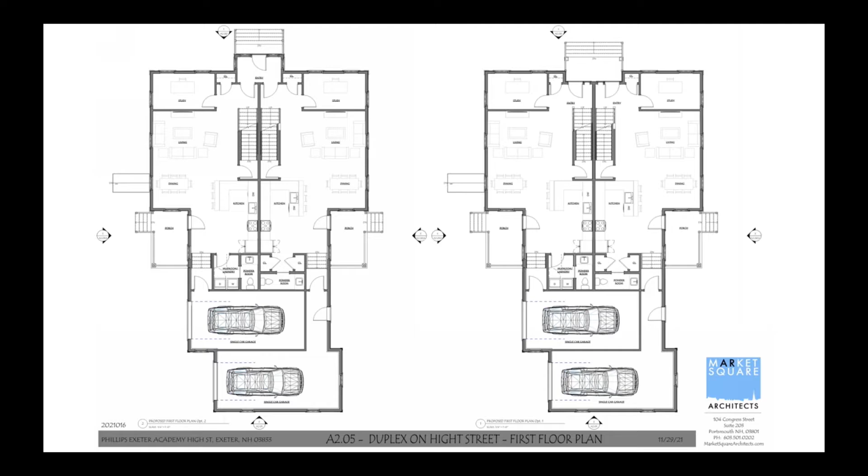And that's the garage side elevation. That actually faces Gilman Lane. And the details, the layout, just the house will be on the front, and the garage will be on the back. Correct. So the front, that's the front elevation that faces High Street. So that's all you'll see. Correct.

This is the elevation that faces High Street. This is the side that faces left to 35 High Street. So that's that garage mass in the rear of the building. This is the side elevation that faces Gilman, so those are the two garages. Gilman Lane comes down here. This is where it becomes a landscape area, and we truncate that drive, and there is a turnaround at the end.

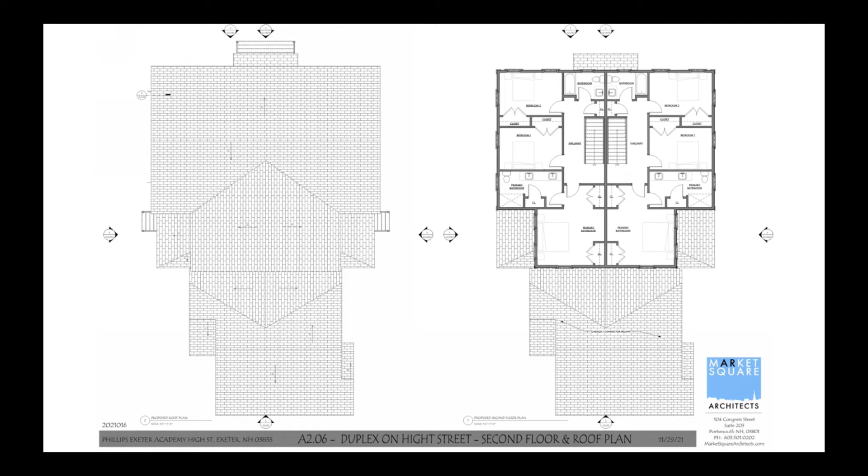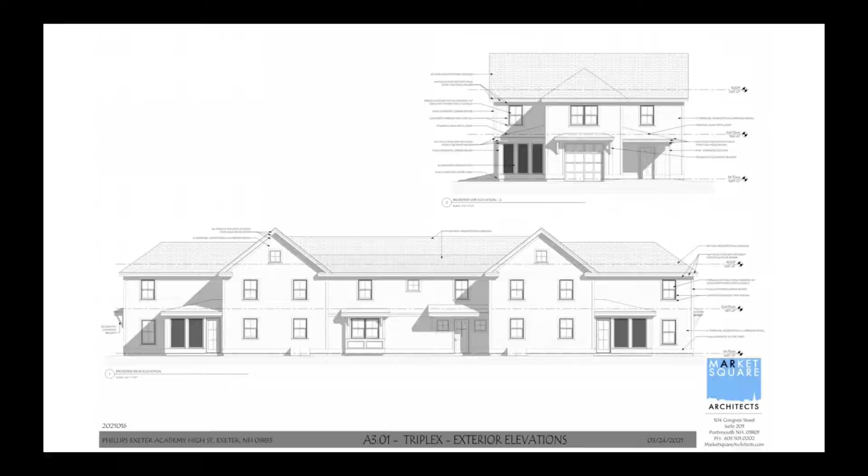So this is that triplex in the middle of the property. This building, we are still in conversations with the HDC, it has not been approved. So this is entirely faculty housing, there's no student housing at all in these structures, thank you. It's faculty housing, and there's a few different types.

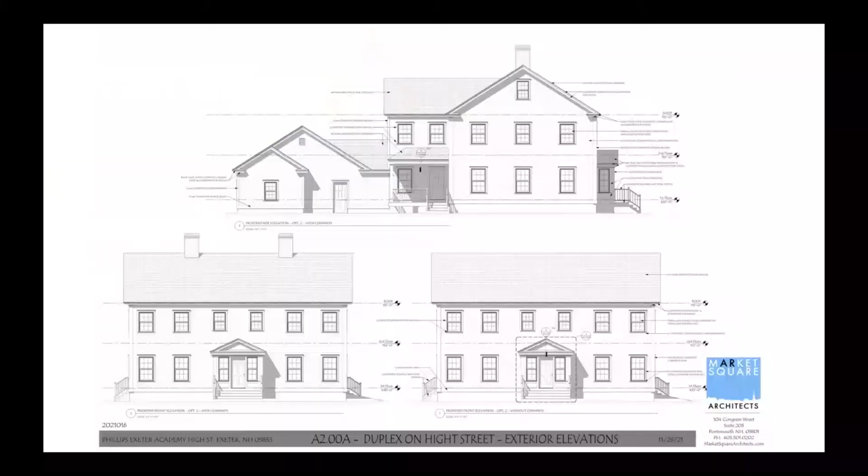So this is the duplex that's in the rear of the property. These are intentionally sort of traditional forms, traditional details, but a little bit of a step away from the historic, intentionally, where the historic buildings, a part of the HDC, are in the front. These buildings are outside of the HDC, by approximately 4 inches, I'd say.

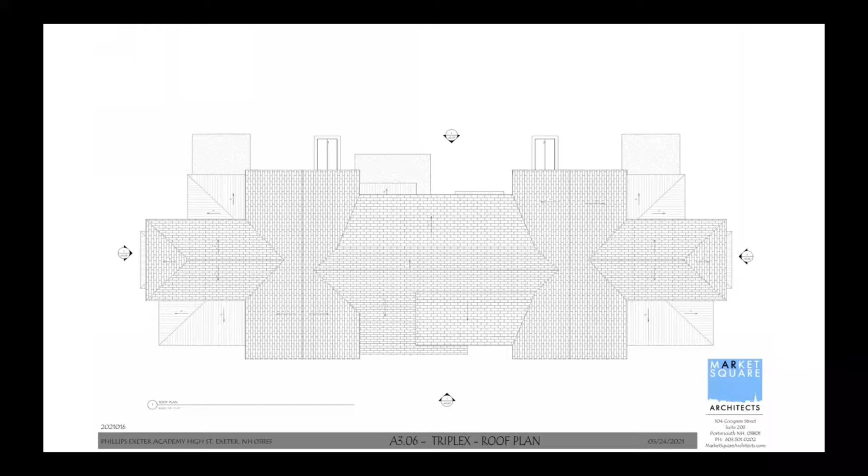Skip ahead. Oh, that's it. Will they have a walk around, or a sidewalk on all of these? So that sidewalk, I'm gonna go back to that site plan, I know I'm jumping around. So there's only gonna be one sidewalk? Yeah, so the sidewalk comes down along this side and remains on that side and terminates basically where that gate is that goes back to the extension of Gilman Lane down to the athletic fields.

So the shaded area here is the portion that is outside of the HDC, and they have this drive that comes over to the existing Stuckey garage. This is a single family and 2 duplexes in the back, essentially identical other than color and some details. This is the triplex where we're still in conversation with the HDC, at that center road. Here you see the truncation of Gilman Lane, although there is a turnaround at that end. This is the new duplex that's been approved on High Street, and then this is the existing 35 that's being renovated.

Variance here. Are there any specific questions on design, or does that give you the flavor? That was very helpful, thank you very much.

Just one last thing - we already have to go through site plan subdivision review with the planning board. We've already met with the Exeter River Advisory Board, so we've reached out to them. This project is also going to require a New Hampshire DES alteration of terrain permit, so we'll have a review from them, and we're going to be submitting a shoreline permit application because of the proximity to the Exeter River. So we have multiple reviews that this project will go through. Certainly for stormwater management, we're going to be meeting all of AOT and the town's stormwater regulations, providing stormwater treatment and retention to a site that was developed prior to any of those regulations. So we're looking to provide some significant improvements to the site as well.

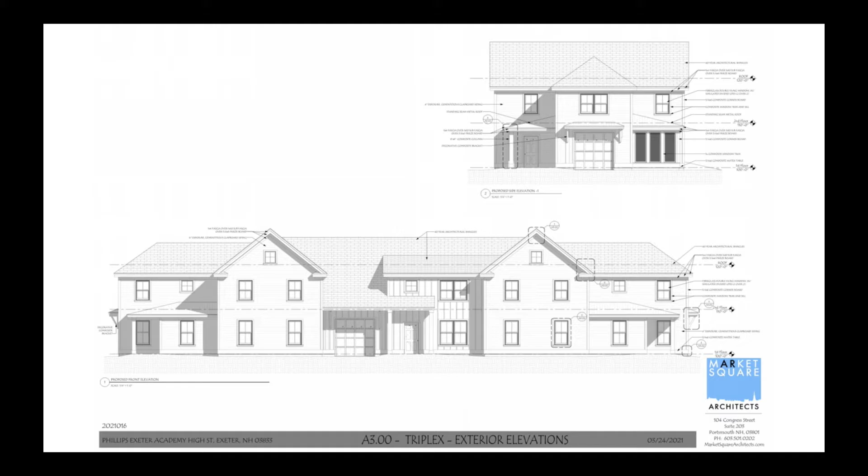This is a unique area because it really... oops, what did I do? This is why they don't give me the thing. Yeah, I'm getting way beyond my expertise when you start putting up those drawings. And how do I zoom in? Because I did - next slide. Oh, here we go, okay.

So this is a unique area because it's a blend of commercial and residential. It's on the outskirts of the residential district, and we're trying to find a way to use it that kind of marries those particular uses.

As a result of this special condition, there is no fair and substantial relationship between the 25-foot setback requirement and its application to the property. Again, as a transition area, it makes sense to have something that's sort of between what C1 and R2 require.

It's consistent with what's there in the rest of the neighborhood, particularly along this area. It makes little sense to push this duplex back when most properties are even closer. The existing sidewalk and elevated curb provide additional buffering that make the need for a 25-foot setback less severe. The proposed use is reasonable—duplexes are allowed by special exception, and we're complying with HDC requirements. The HDC has viewed our attempt to line this up with 35 High Street as a favorable aspect of the proposal, even though it doesn't meet the 25-foot setback, and it's consistent with the rest of the neighborhood.

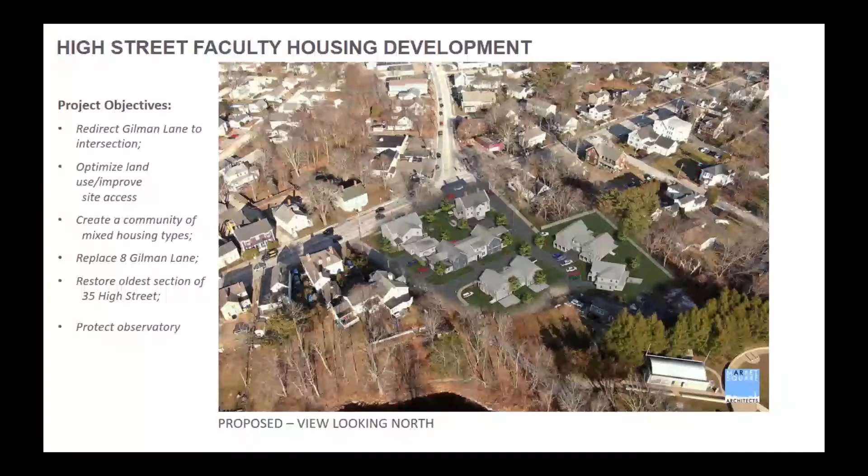The special exception is to allow the 3 duplexes in the R2 zone—not 35 High Street, because that exists as a 6-unit now and will go to a duplex. So, I apologize for interrupting, but the triplex—are you only asking for special exception relief for the 3 new duplexes? Correct. The triplex is obviously part of the plan, it's there, we're dealing with HDC on it. We may get the triplex, we may not, I don't know, but it's not something we're asking you to approve tonight.

I guess I was a little confused, as I read it—unless I'm missing it—duplexes are permitted by special exception, but this is partially in the R2. I believe the code enforcement officer's position, correct me if I'm wrong, was that because the triplex will be located in both zones, it was allowed because a good chunk of it is in the C1 zone. It wasn't called out as an area that we need relief for. So the lot line adjustment does not impact the underlying zoning.

Correct. So partially, the new lot will still be in 2 different zones, and the building itself will be in 2 different zones. Here's the triplex, here's the old lot line, which is also the zone line. You can see the triplex, if we're able to proceed with it, will be—this is the lawyer's eyeball, not the engineer's calculation—primarily in the C1 and not the R2 zone. Our understanding from staff was that in that situation, it's considered to be in C1, and triplexes are allowed in C1 because the building itself is in both.

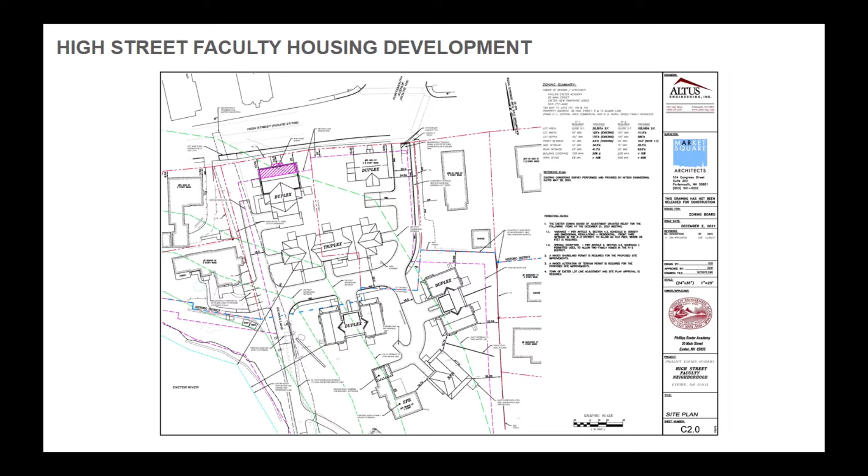We're also proposing, you can see it fairly well here, these are the 2 duplexes in the back. There'll be a 6-foot-high fence here, which will provide some buffering along the property line for the neighbors located in this particular area.

Special exception criteria under section 5.4. Number 1, the use has to be permitted by the zoning ordinance. Article 4.2, section 1 does provide that duplexes are specifically allowed by special exception in the R2 zone.

Criteria number 2, the use is designed, located, and proposed to be operated so that the public health, safety, welfare, and convenience will be protected. We are providing on-site parking, so there's no issues with parking.

As we've discussed already, we're providing all access, ingress and egress from the signalized intersection with a wider curb cut than what currently exists at Gilman Lane, with the road that leads to all of the particular properties here. We believe that will be a better, safer way of getting in and out of the property than having people go through Gilman Lane, which is kind of a dark, narrow, driveway-looking thing. So this will be much more of a road, wider, and signalized.

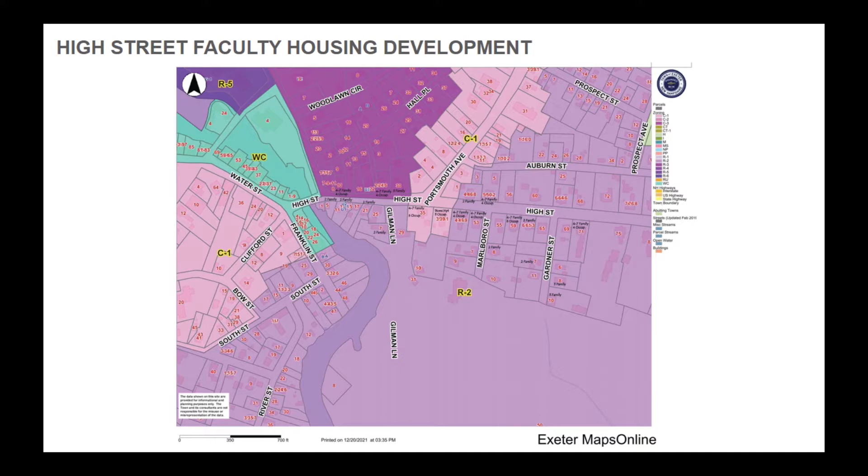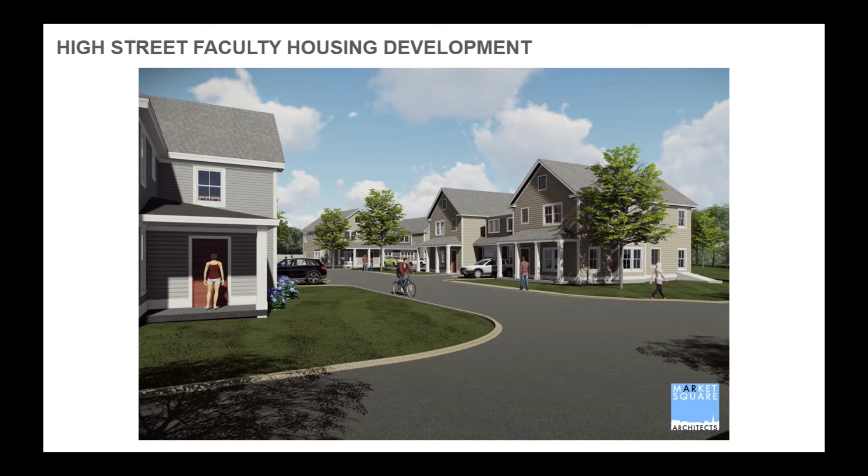Adequate landscaping and screening - I talked about the fencing, I spoke about particularly the side buffers along the back. It's our intention to create an area that is appropriately screened from other abutters and other people in the neighborhood who could be affected by this development.

Adequate off-street parking - all of the parking will be provided on site. There's no on-street parking. As you've seen, we have garages and parking areas, and you can see some of that depicted on this as-built type of plan. Again, we're adding just 5 units to what's there now, so it's not maybe as big of a difference as it would look at first blush.

Number 6, the use has to conform with all applicable regulations governing the district. The only one we didn't comply with is that 25-foot front setback. If we get variance relief from that, then we would meet that requirement easily.

Number 7 is that this board, as a condition of a special exception, can require planning board review. As we've told you, that's going to be required anyway for both the lot line adjustment and the site plan. I always appreciate the desire to understand the big picture, but a lot of those details will get fleshed out at that level when we get in front of the planning board to talk about all those technical planning details.

Hopefully, once we have the variance and special exception in hand. Number 8, the use will not adversely affect surrounding property values.

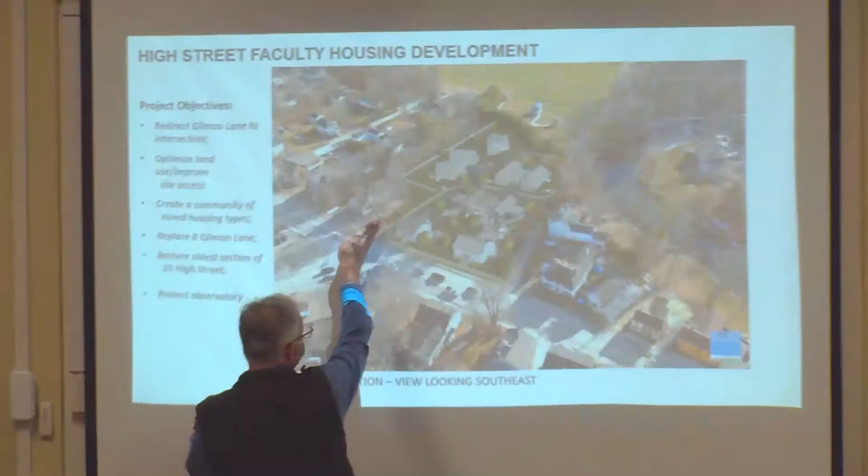I'll just remind you that when the Court Street development was proposed, which was a good development and well executed, a fair amount of discussion was had about the public access to the sports fields at that time. I sat on the board.

There used to be a beautiful archway and some granite stairs that went down there, if you recall that. They were sacrificed for that development, which is fine. But a lot of discussion was had about how people would be able to access the areas that the public has historically been privy to accessing. There was a lot of assurance made that that was going to be maintained, and there is actually a little path that was an effort at honoring that commitment.

Now, practically speaking, it doesn't matter. People use that area by the gym, but I just want to point out to you that that was a pretty lengthy discussion that was had that was not followed through on.

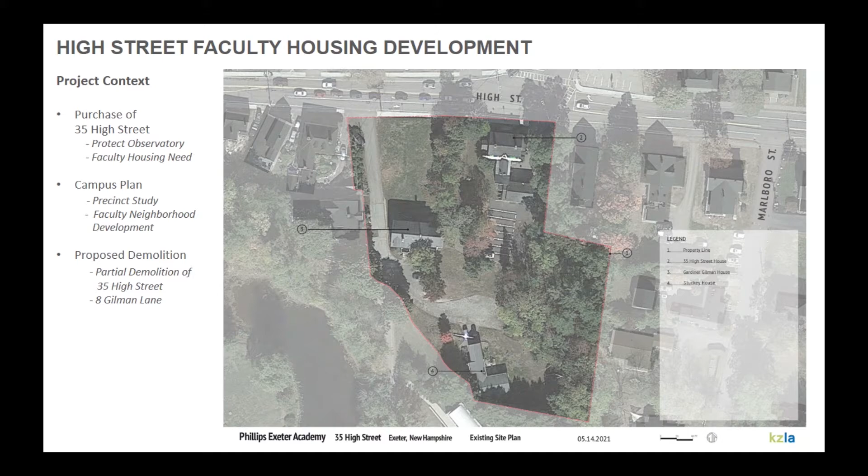So trees that are in this area would come down for the construction, and then within that 25 to 30 feet that we have to the buildings back here, we can maintain landscaping, and everything on this side is the abutters. I know you've talked to some of the abutters, but it doesn't sound like you've had these discussions with the folks on Marlboro Street.

It says the landscaping, I mean, I certainly understand the concern. It is a significant amount of existing trees that are coming down. Is there consideration of a bigger vegetative buffer, rather than a 6-foot fence on the property line which is not really going to shield the view?

Do we have the existing conditions plan in this set? I'm not sure if we do. We all have a copy. We have it, I know you have a copy. Let's go to the landscape plan, it's in the back here.

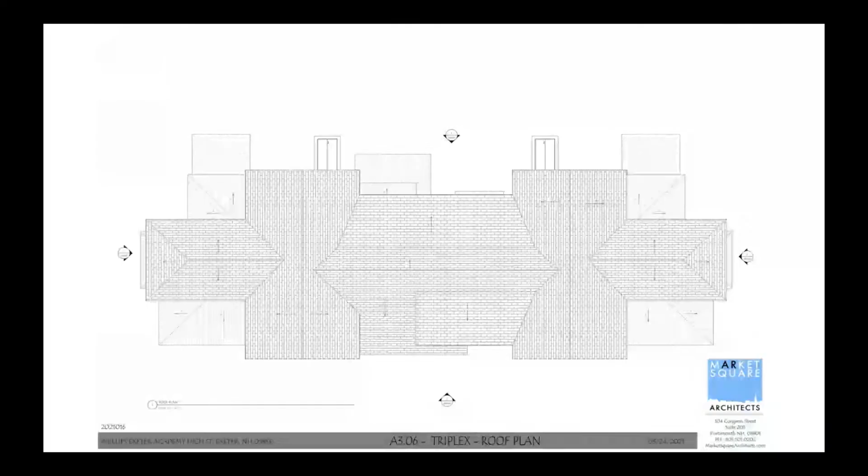So if it's all junk, then it makes sense to remove it. I believe our landscape architect on the project had a similar opinion, that a lot of those existing trees were not worth trying to save, and it would be best to plant some new trees in that area. I recognize the landscape plan will be reviewed by the planning board, but I'll let them respond to your comments first.

Yeah, I'll just add, again, Mark Layden, Director of Facilities - the fence was what we thought was a good delineation on the property lines. If 6 feet is not what you feel is an adequate buffer, or if we wanted to go with planting something, we're open to that. Trees only last so long, shrubs only last so long, so we can do a combination of things like that.

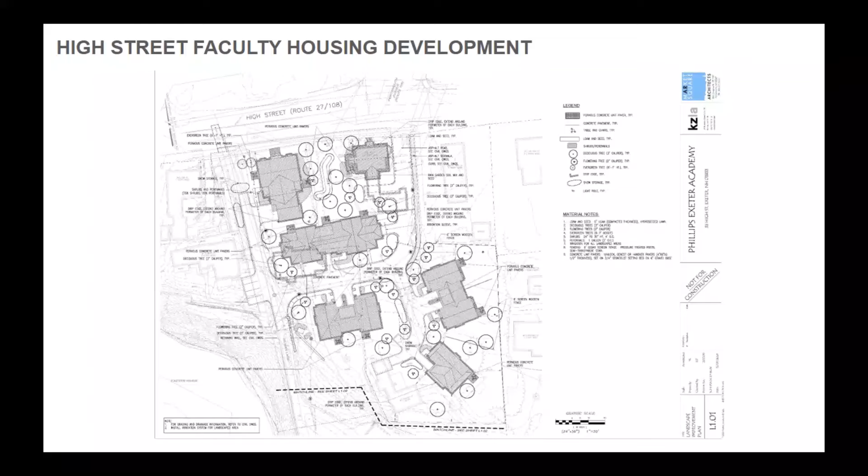And I'll let you continue your response. I guess the only other point I would make is, again, in terms of multifamilies in the area, we looked today and Corey identified what's right along High Street, Marlboro Street, Gardner Street, Gilman Lane. This is not unusual for this neighborhood. Doing this sort of duplexes with the attached garage actually allows us to leave more green space, and rather than putting a single-family house 15 feet on the line, we can do something 25 feet away and work on that buffer, as opposed to pushing things out to the max. So that's part of what we're trying to accomplish here.

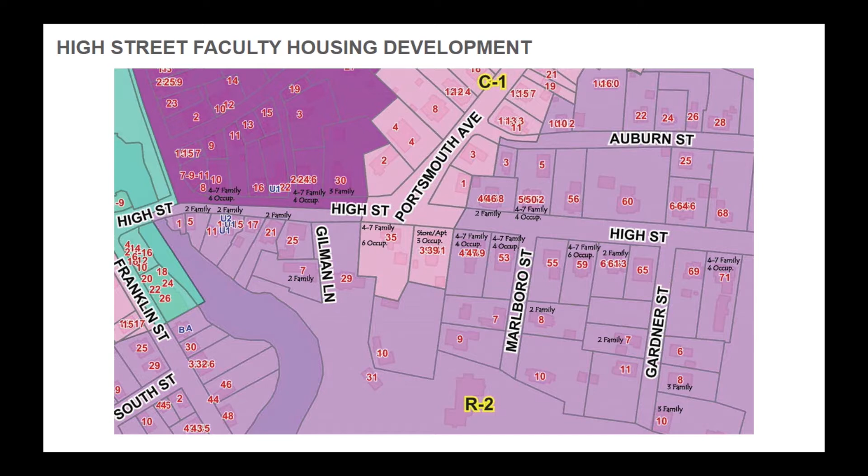I will note, just for the record, a couple of these - on Marlboro Street, I can't speak to Gardner Street, but I am familiar with, and that number 7 is not a two-family. And number 10, I think, is actually a commercial structure, weirdly enough, back there, but there is another two-family, I believe, that's behind that.

But if you're going to continue using that, I don't believe that's accurate. This came directly from the town's database, so if that's an error, it should circulate to staff. Fair enough, fair enough.

And then I guess I'd ask you to speak as well. I do take the point about public access. I do remember the conversation about Gilman Lane - it was the other side of Gilman Lane, but there was a commitment to keep it open to public access. It was a little different - that was public there, and the town had to vote to close it. But I'd like to hear you speak to public access, because I think that's going to be important. It's important to me, and I think it's probably important to other folks, because as I'm sure you're aware, this area gets a lot of public use, and it's a real benefit to the town.

So in terms of public access to this area back here, there's about 300 acres of trails that go out there a ways, and public access to the fields and those trails. The primary public access is through Gilman Lane.

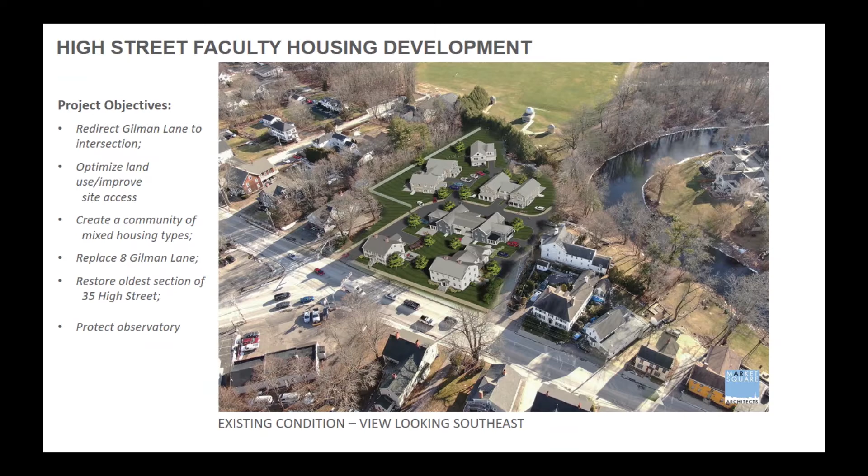Once you've made your decision, there's not going to be much meaningful discussion about buffering. Just saying, all right? So just wanted to make that clear. I don't quite understand the hardship. I don't quite understand the suburban-style design.

And I just want to make also clear, I want to come back to the whole thing about the access. Remember, my point was about the Court Street development and the pedestrian access through the Court Street development. I didn't say anything about the transfer of ownership of Gilman Lane. So just want to clarify that.

Now, if any of you have been around Court Street, I don't know if you can picture it, but there is no path there anymore, as was proposed when it was originally. It's no big deal, but I'm just saying that was the discussion that was had, I don't know, 20 years ago, 15 years ago, and it's just not there anymore. So I expect the same will happen here.

And that's not even getting into traffic that gets pushed onto Marlboro Street and the subsequent street over, where during football games, we get to direct traffic and explain to people how they get to the fields for various things and what can be done and what's allowed and what's not allowed. Okay? Thank you. Thank you. All right.